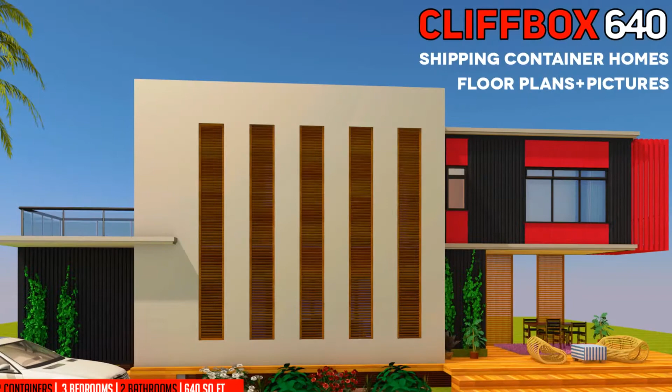Modern shipping container homes plans and modular prefab design ideas. CLIFFBOX 640.

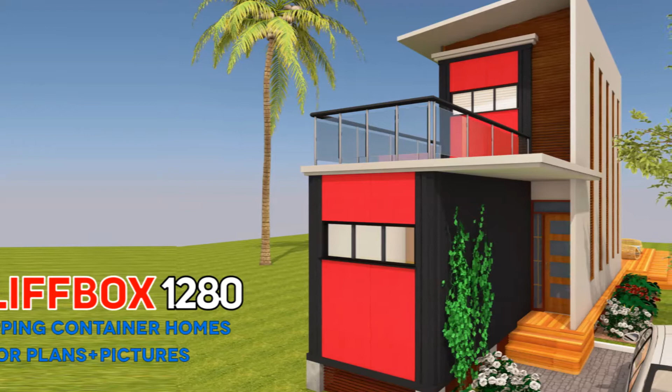This video brings to you CLIFFBOX 640. This is a modern shipping container house designed using two 40-foot shipping containers to form a 640 plus square foot house. This video covers a complete presentation of dimensioned floor plans, a cost estimate checklist, and detailed drawings you can download for free to use on your own shipping container house project.

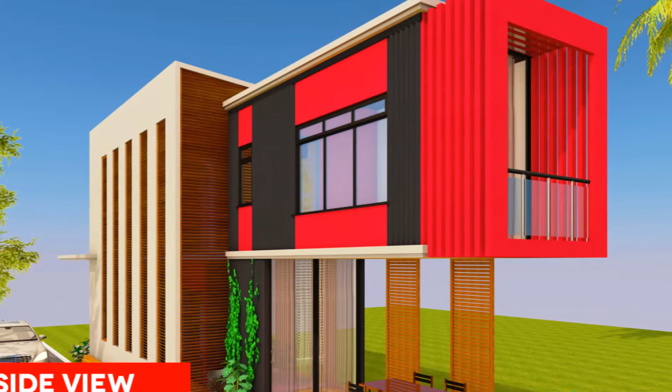The structure and design brief. This 3-bedroom, 640 plus square foot house is made from two recycled 40-foot high cube shipping containers. One of the containers sits on a pier foundation and the other is stacked on top, cantilevered to create a two-storied house in the form of a cross box.

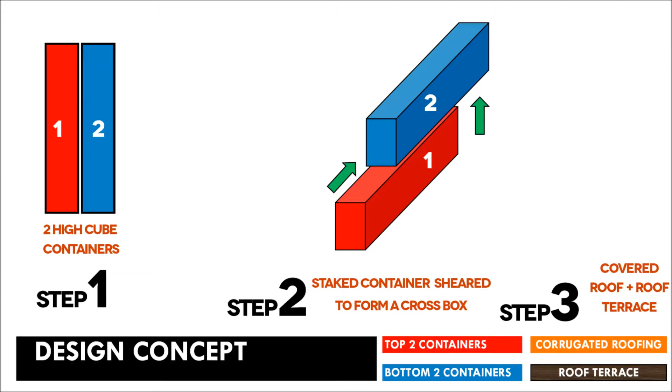The design decision: we prefer using high cube containers because they are 300 mm taller than a standard container. This provides an extra foot of ceiling insulation without compromising the headroom of the habitable space. The container on the top is cantilevered to create a dynamic outdoor retreat area under the cantilevered canopy and a roof terrace on top.

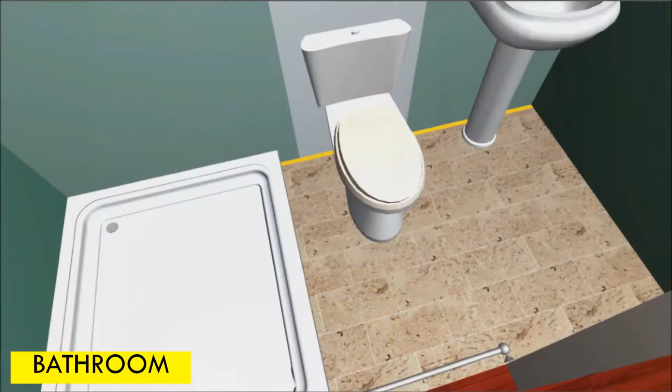The 40-foot container on the lower level houses a guest bedroom, fully fitted kitchen, a bathroom and a living room. On top, we have a stylish master bedroom with a full bathroom and walk-in closet, a rumpus/children bedroom and a family terrace.

The upper story is accessed by lightweight steel stairs made from recycled container cuttings mounted on a steel frame and welded onto the wall of the lower container. The staircase is housed in an iconic stair shaft made from different materials to introduce flair into the house design.

The shaft acts as vertical circulation in addition to providing structural support to the cantilevered container and also adding to the aesthetics and charm of the house design. The top of the staircase is covered with an elevated skillion roof covered in corrugated sheets.

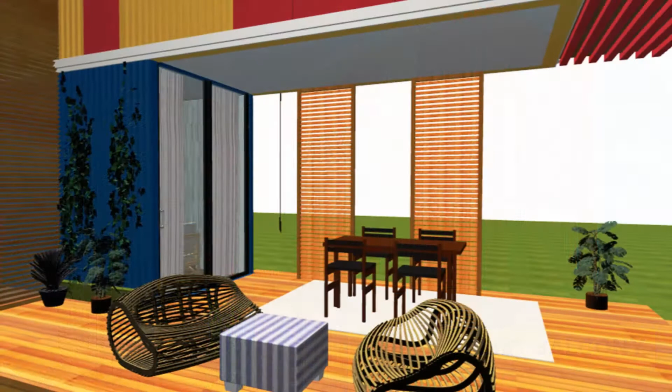The floating ends of the boxes are transformed into Juliet balconies for the master bedroom upstairs and recessed doors to the living room below. In addition, the resultant end panel openings are fitted with full-height sliding glass doors. Sliding doors are good space savers compared to swing doors, making them ideal to use in a container house.

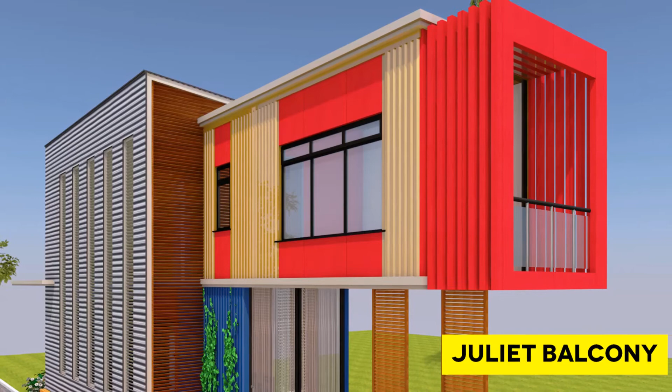Foundation and modifications. The containers sit on a reinforced concrete pier foundation to elevate them from moisture. The foundation is made of 8 concrete piers, 300 mm square by 450 mm high, spaced 3 meters apart center to center. For a storied container house, remember to consult a structural engineer on the size and the load-bearing capacity of the foundation piers to use.

This pier foundation allows for continuous airflow to keep the container cool and enables plumbing with ease. Walls of shipping containers are inherently structural and load-bearing. In addition, shipping container modules are designed to be stacked at the corners. Loading them at any other position or cutting out too much steel from the walls for doors and windows interferes with the structural integrity and strength of shipping containers.

Our design principle at Sheltermode homes: we do not tamper with the roof and the floor of shipping container modules. It is very costly to restore the roof and the floor as compared with bracing and reinforcing the walls for window and door cutouts.

In this design, very little steel is cut out from the containers to warrant any special reinforcement.

Outdoor living space. Apart from the drainage and moisture benefits, the elevated position of the house provides the height necessary to construct a deck. A deck is a quick and easy way to add extra living space to a container home by greatly extending outdoors the compact living space inside a shipping container. The space under the cantilever can be used as an outdoor retreat space.

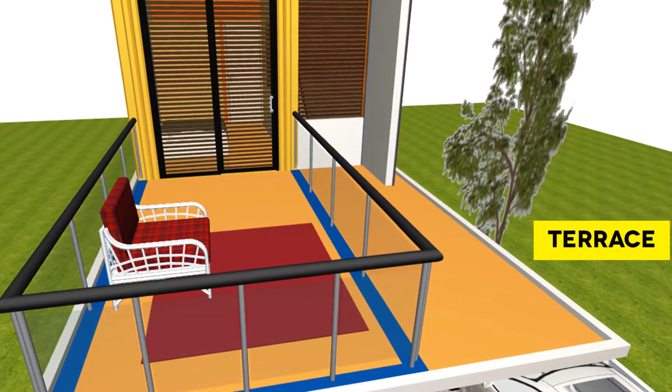In addition, the roof of the lower containers creates a private family terrace on the first level, creating even more outdoor space. The terrace is accessed by a 2.1 meters by 2.7 meters sliding glass door. The house is accessed from the side with wooden steps.

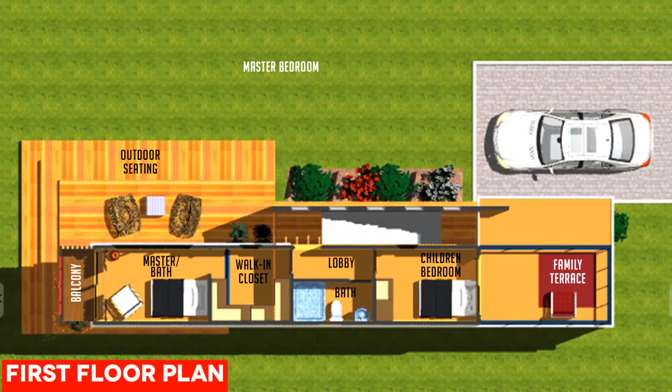Furniture and interior design ideas. Fitting furniture into a shipping container home can be a challenge. Most furniture hasn't been designed specifically for such small spaces. Multifunctional transforming furniture and other space-saving essentials effortlessly transform from one use to another, allowing a single space to perform more than one function. To complement the industrial look of the container, it's advisable to adopt a minimalist design to make the narrow space feel somewhat spacious.

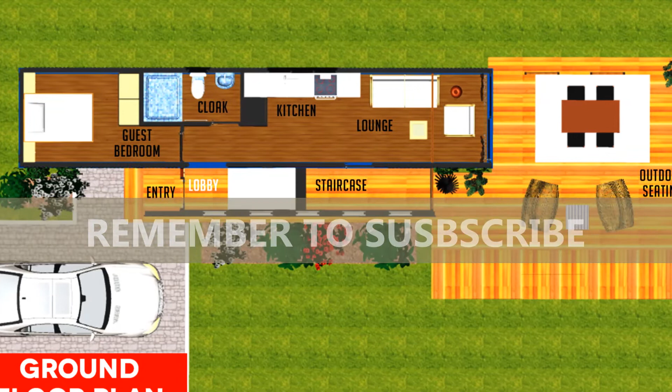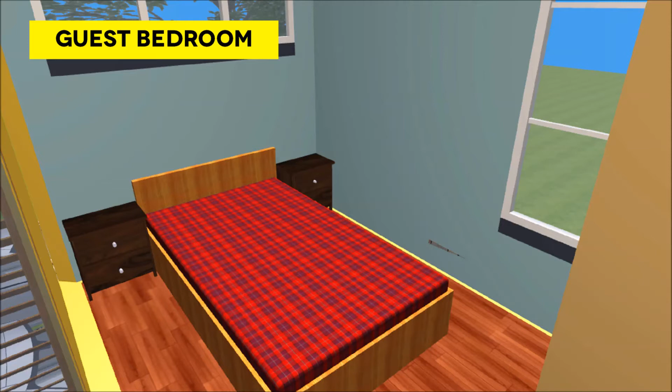To minimize the claustrophobic feel of living in a shipping container, the walls of the living area are finished in monochrome light-colored paint. Since this is a container house, consider using similar materials to finish the interior spaces, in order to maintain that industrial look. This repetitive theme creates harmony, therefore making the house appear bigger. Consider using a vertical wall-in bed or a Murphy bed in the children and guest bedrooms. Stackable chairs and easy lounge seats can be used for the outdoor dining and sitting under the cantilever.

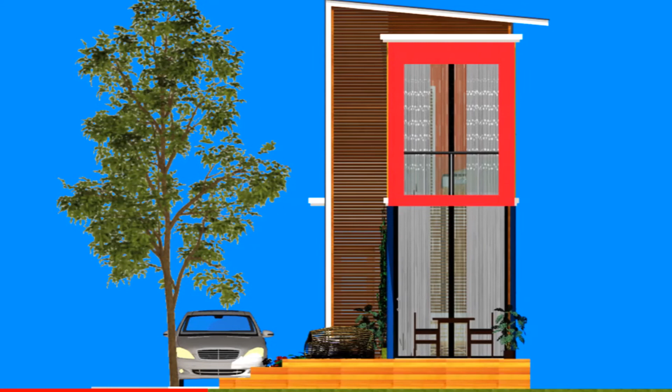Insulation and temperature control. Shipping containers are made of corten steel. Steel is a good conductor of heat, therefore, to live in a shipping container home, you need to insulate the exterior walls. Insulation is one of the most important aspects of turning a container into a comfortable home. Without insulation, a container home would be like an oven in summer and freezing in winter.

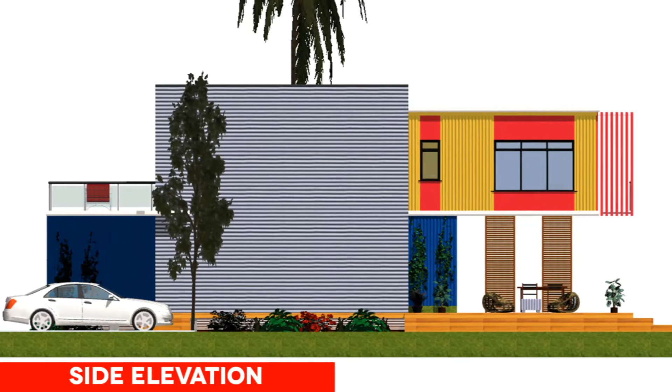Insulation is also essential to preventing condensation, which can corrode the container and form mold. Use spray foam insulation on the walls and ceiling to provide an airtight seal and prevent condensation, if you are building in a cold and wet climate.

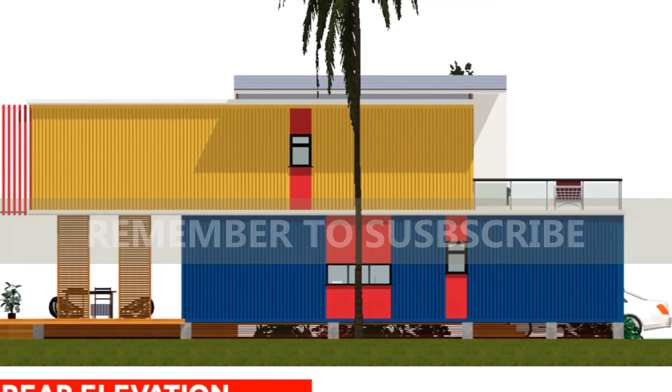The cantilevered containers are covered with an elevated corrugated steel roof to guard them from rain and direct sunlight. In addition, the corrugated steel roof is elevated above the container roof to allow for airflow to keep the container interior cool in summer.

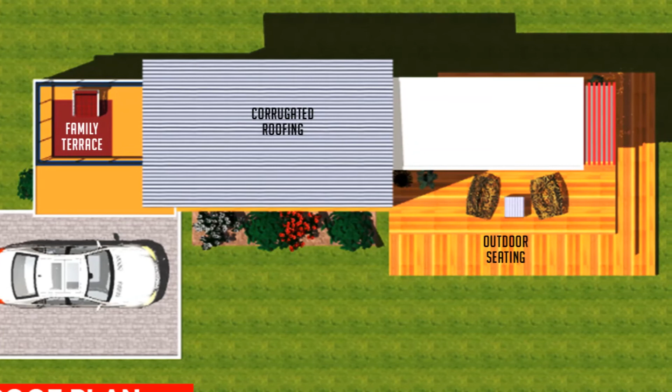Consider covering the remaining part of the container top with a roof garden planted with native plants and flowers. Design the garden planter in such a way that it sits in a steel frame above the roof of the container, to allow for airflow and keep the weight off the non-structural container roof. The green roof adds both charm and natural insulation from direct solar gain.

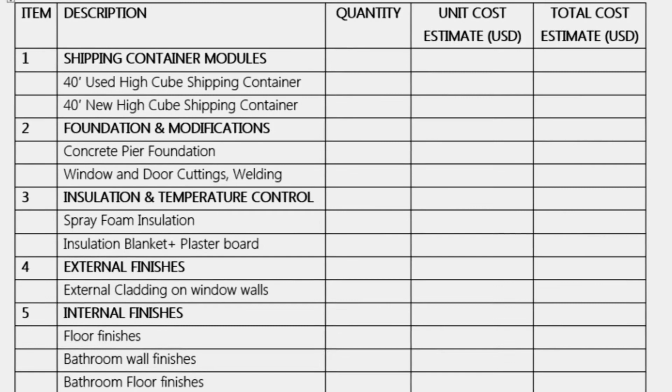The cost estimates checklist. This checklist is to guide you on the items to consider in your own container project. The prices of the items are subject to vary depending on your country, currency exchange rates, taxes, and government regulations. For correct and factual figures, consult the relevant experts in your country.